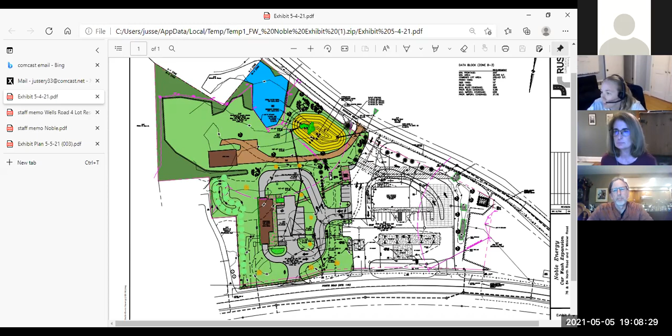Or I'm going to say further to the south, I guess, from where we're located. Let me try and make this just a little bit bigger. Here we go. So there's a wetland delineation line, and I'm following it with my cursor now, that comes around the side of the pond, comes back in, and continues on its way to the east.

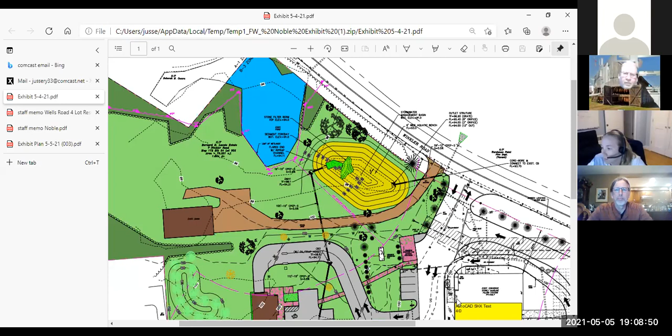And Jay, could you orient me what's north? North would be at the bottom of the page, looking towards North Road. Okay, so we're on the south side of North Road here. So Kurt, if we're standing in the gas station and we're looking out at North Road, we're essentially looking north for the most part.

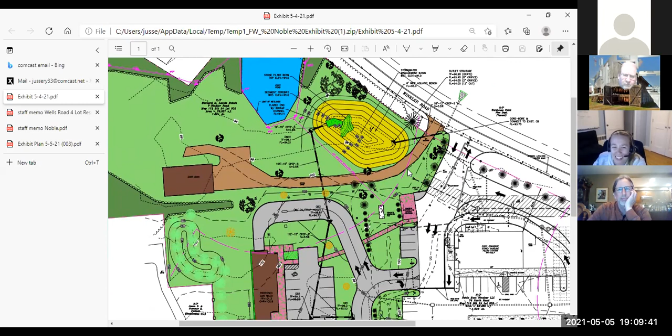So this small wetland area shown on the parcel is actually part of a fairly extensive wetland that continues on to the east and the south, and it's all within the watershed. Now I'm going to try to remember the name of the brook, and Rick Osborne is on, and I know he knows it, but I think it's Bowen's Brook, which comes northerly and westerly.

This portion that we're looking at here leaves this property and goes under a small culvert under Winkler Road over to the side where the trolley museum is, and then continues in a northerly and westerly direction, and eventually gets under North Road, goes down behind the WB Mason's building and goes under Route 5 near, I can't remember the name of the store, but there's a large office building in Enfield, and then there's a retail store on the opposite side of the road.

And it goes under the road there, where the coat factory used to be. Yep, the coat factory. And then goes under the highway and finds its way eventually down to the Connecticut River in Enfield.

So it's a fairly extensive wetland that in fact is part of the same watershed, the upper reaches of the Bowens Brook watershed. So this wetland area here was delineated by John Ianni a number of years ago, when these parcels were subdivided—I think it goes back to 2014.

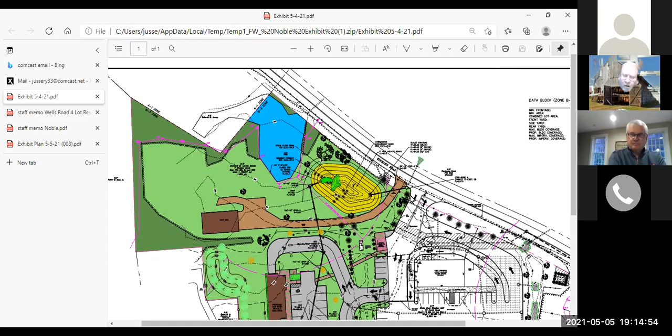Basin with a water quality volume. This will have water in it all the time. It's also got wetland plantings in it to uptake any of the nutrients. And then our outlet is at 94 as well. So as I said, the bottom's at 91 and this is at 94. But to answer your question here now, I've got it a little bit larger, Kurt.

You can see the 100 contour, 98, 96. So this currently drains all towards the pond, towards the wetland, and we're not proposing to change any of that in this given area here. The area down here where we're actually developing will be picked up in the actual drainage.

I guess it would be fair to say there's no developed runoff that's going to go into this wetland. The area of the development here where the paving is and the building is all piped directly into the actual basin and goes out this way. It doesn't go into the actual wetland.

The contributing area to the wetland here will continue to go there, flows across the grass area that Bernie Lavoie actually had mowed all the time he was there. I don't know, maybe it hasn't been mowed in the last couple of years since Bernie's gotten up in age and since passed and moved to Florida. But this area here is always maintained as a lawn area and all flows into the wetland, and it'll continue to do that. We're not changing that.

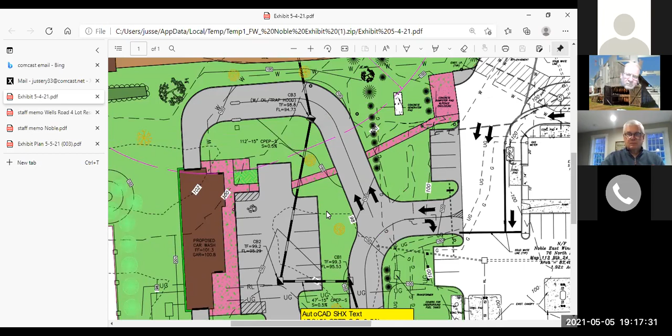And of course, the water that's in the car wash, that's all being captured and dealt with separately, correct? The water goes through, I think, 2 or 3 grit separators, an oil water separator, and then that goes into the sanitary sewer system. The majority of the water, though, is recaptured and reused. I don't know the exact amounts, to be honest, but I want to say it's somewhere around 80% of the water used in the car wash is recycled.

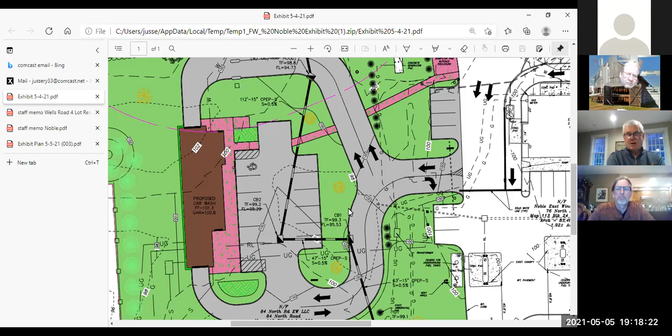If they were to discharge all that water into the sanitary sewer system, the expense to tie into the sewer would be phenomenal, and the expense of the water would be such that the car wash probably wouldn't be viable. The basin is designed all the way up to the 100-year storm, so at any given time during a storm event, there will be no increase in peak flows leaving this site and going across the road into the Bowens Brook watershed.

Without the basin, that worked out all right? Did it work? Yeah, it did. No, actually, without the basin, there would be substantial increases, obviously, because of the increase in impervious coverage. So it couldn't be done without a basin. The basin is necessary because I don't know how well the state maintains their culverts under North Road—you know, they don't do a very good job.

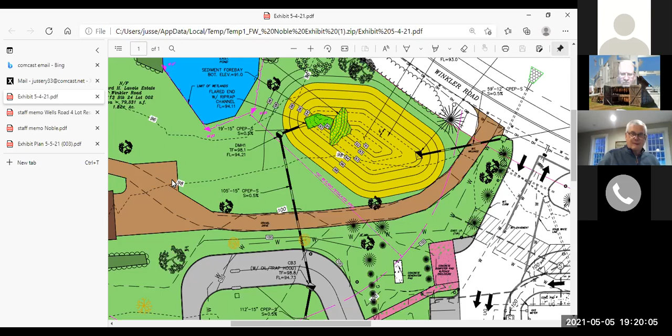Sticking with that detention basin a little bit, the drainage stormwater calculations for the 100-year storm and all that, they're based on the water coming from the pipe that's being collected on the site. Do they also take into account any runoff that's coming from the ground around that?

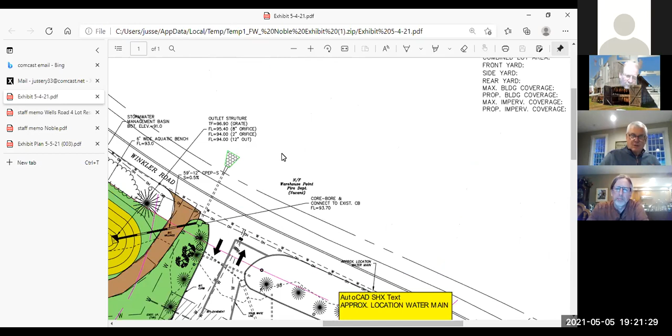Yeah, they do. We look at all the contributing drainage areas, and what we look at is the pre-construction scenario—how much water is being contributed to that particular area, how much is going there pre-construction, and then how much post-construction when we add the additional impervious coverage. So I think what you're asking is do we take into consideration this area that already goes there? And the answer is yes, we do. We look at that because we're adding water, and that's the reason for the detention basin—we want to make sure we don't increase any of the peak flows.

Is there any maintenance on the detention pond? There is maintenance, and I'm going to be honest, I didn't read it, but typically we would put a maintenance schedule on our E&S sheet. I believe it's there. If it isn't, it would be added. And yes, there is maintenance required.

The basin or the forebay does need to be cleaned. It will accumulate some sediment over time and needs to be cleaned out. The basin itself, hopefully not so much. The one thing it does require—and we've all seen them over the years in different locations—is if you don't at least mow it to a certain degree, you end up getting some very large, sometimes woody vegetation. You'll even get trees starting to grow, and you don't want that. That's a problem, so it does require some maintenance. It's not something you build and walk away from thinking it's going to work fine for the next 50 years, because it's not. It would eventually fill back in with trees and shrubbery.

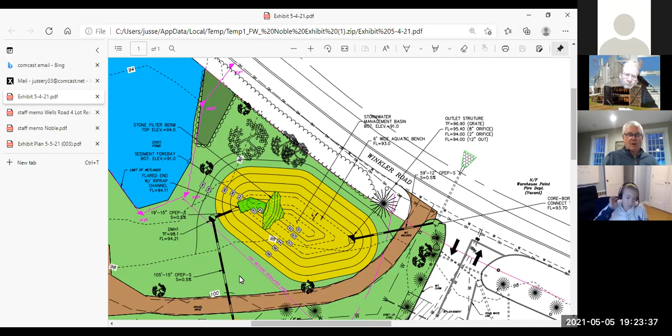Question on that—go ahead, Dick. Since you brought up the maintenance schedule, is the plans going to be good enough to cover us in the future, or should we make condition 15 a requirement? If it's good with the plans, I'm fine with it. It's all detailed in there.

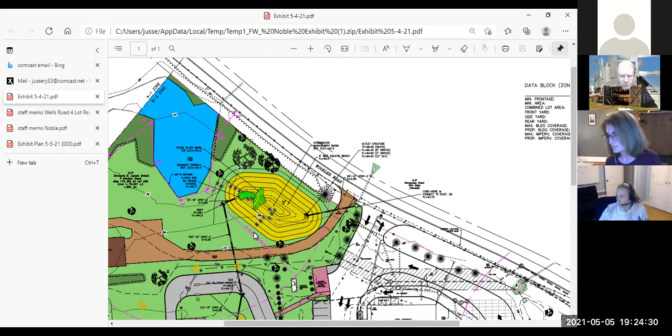The other comment about the flooding around there—I was very skeptical when they approved the gas station, and I really was wondering, and you know what, there's been no problem whatsoever. It's exactly the way the picture shows it. So I think this should darn well work.

I agree, they're going to fix the roads. I read that somewhere. The first thing they better do is lower the pipes under North Road—that would eliminate the whole problem. Dick, when did the gas station go in? What was that, 4 or 5 years ago? Not that long ago. So it missed the big floods from Hurricane Sandy and Irene and all those big storms. Well, nothing's gonna work then anyway.

All right, I don't have all my questions—all of my questions have been answered. So I'll open it up once more if there's any other questions. If not, I would entertain a motion to approve. No questions? Okay, well, thank you, Ruth Ann.

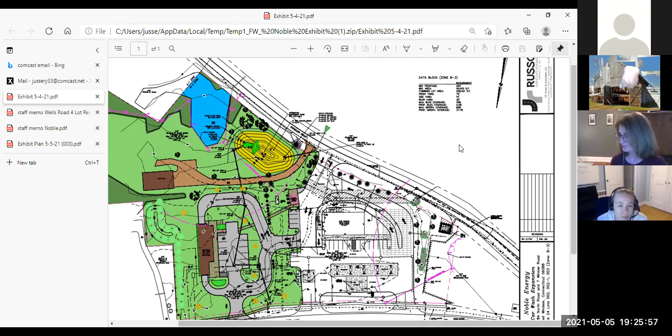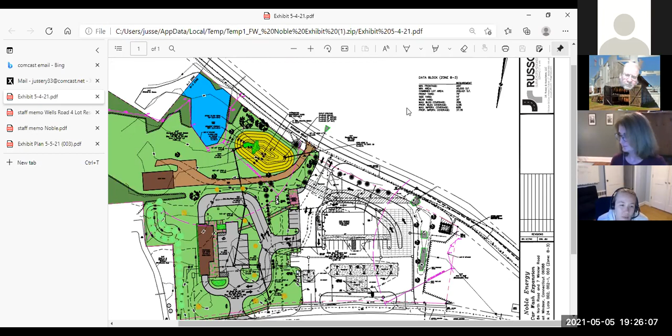Motion to approve application IWWA 03-2021 to Noble Energy, Noble East Windsor LLC, for the construction of a 2,340 square foot car wash, associated parking, drives, and stormwater management systems in the Upland Review area, located at 76 and 84 North Road and 7 Winkler Road, Assessor's Map 113, Block 24, Lots 002-1 and 003, as detailed on site plans entitled Noble Energy Car Wash Expansion, 76 and 84 North Road and 7 Winkler Road, East Windsor, Connecticut 06088, Map 113, Block 24, Lots 002, 002-1, 003, zoning B3, prepared by J.R. Russo and Associates LLC, Sheets 1 through 11, dated 4/05/2021, last revised 4/28/2021, with the standard 14 conditions.

Second. I'll second that. All right, I heard Alan first for the second. Any further discussion? Hearing none, all those in favor? Aye.

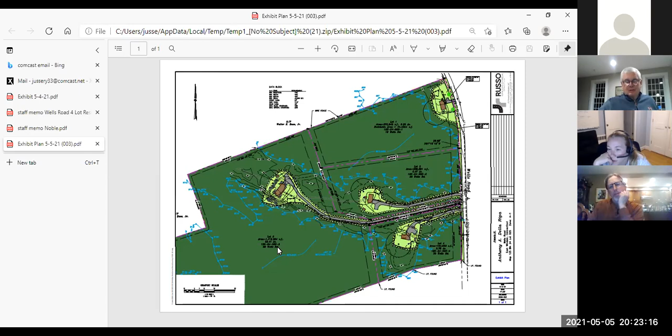So on the back lot, it would be on either side - I guess it's the north and south side of the lot, right? And the same here. And it's only the north side of the lot on the middle lot, and only the south side of the lot on the bottom lot, and the west side of the lot on the top lot, right? So I don't think we need to specify that, I felt like Jay would figure that out.

That's why I gave you the 200-foot number as a kind of maximum. Maybe, as depicted on the approved plan or as depicted on the Mylar. Yep, we could say that's going to update that for us. Why don't you go with that one, Dick?

As depicted on the Mylar, because Jay will send us a revised one with those on there. Okay, here's what I got before - this is not the motion: approved wetlands disc markers shall be installed prior to construction.

I've been typing, if that's helpful. Oh yeah, we don't need to - you're typing it too? Yeah, that's easier for me. But I need control to be able to share my screen.

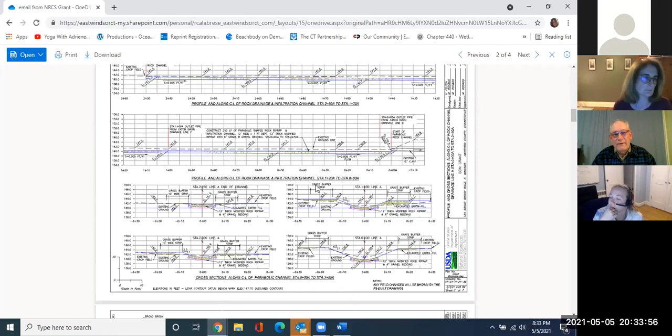In addition, as part of this they're going to make repairs to our current pipe, where we have a couple of damaged areas. The idea is to leave the pipe there basically as an overflow should the infiltration bed become overwhelmed, but he assures me that's probably not likely if it's designed properly.

The state, like I said, was understanding, but nothing they came up with as a plan was really a viable option, and this seems like the best way to go.

The field itself has had the development rights purchased on it, and as part of that situation, we're required to seek their approval for any construction project on the farm, including something like this, and they have given us their approval to get this plan put into action.

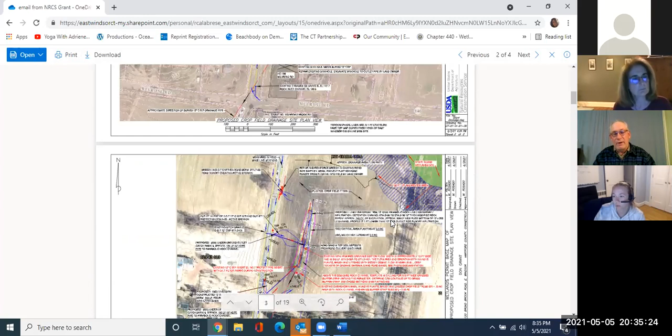The NRCS will be overseeing construction of the infiltration bed and the repairs to the pipe. I almost forgot to mention, where the outlet is to the culvert that currently runs under Broad Brook Road, we're going to put in our own catch basin and a pipe to stop the erosion across the field. South of that, where the berm on the east side of Broad Brook Road is compromised and water runs into the field, there's another catch basin and pipe carrying the water under the field to the infiltration bed.

We're not really going to affect the amount of land being cropped, except there'll be a 10-foot grass buffer around the infiltration bed. What's there now is basically sumac, so that'll be an improvement if nothing else. So that, I guess, is it in a nutshell.

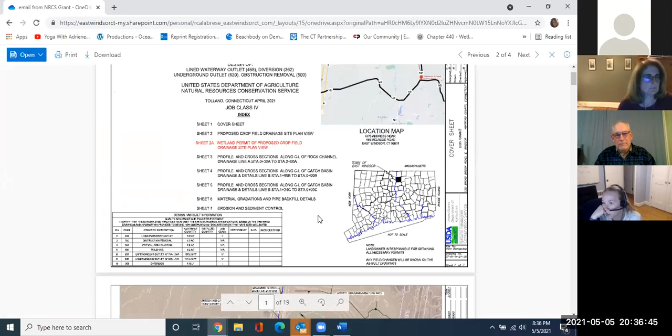So what did you need from us? Just an approval for the, what are we, an as of right? Yes. Yeah, I have zero issues or concerns with this. Does anybody else have any comments?

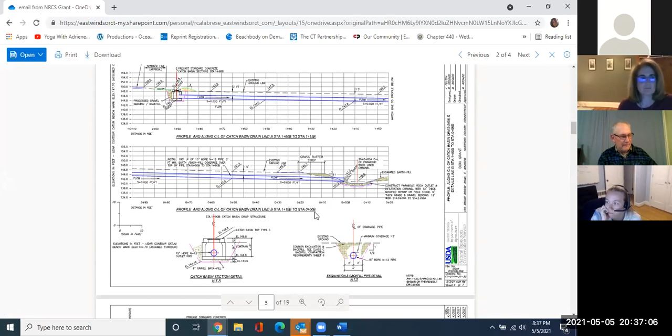Good, continue to farm here, right? Absolutely. I'm happy to hear that the other side is getting addressed. I've been watching that and feeling like it needs some attention for a while now. Oh, here they are, I was looking for these.

Just to get a sense of the area. Yeah, I'm definitely familiar with that area too.

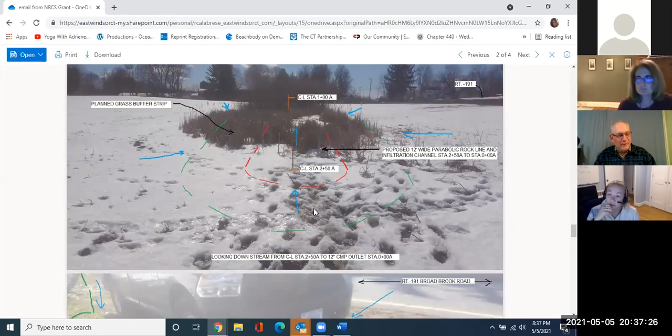It's pretty obvious to see, so we didn't think we should proceed without having approvals. It's not the kind of thing you can sneak by - you'd definitely notice that one. It's like that front lot there you were talking about previously. If you drive by, you're gonna see it. Yep, I might catch you on that one, Don. Yeah, you might.

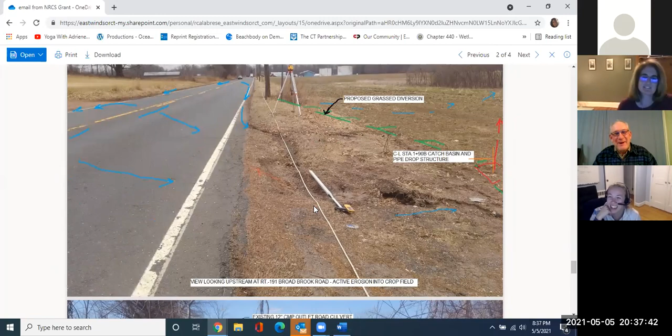Okay, what do we need? Just a motion to make - let me just, if I might, someone made a comment about noticing a problem with the washout on the west side of Broad Brook Road, south of Melrose Road. Yeah, that is where this pipe comes out, is in the low spot down there.

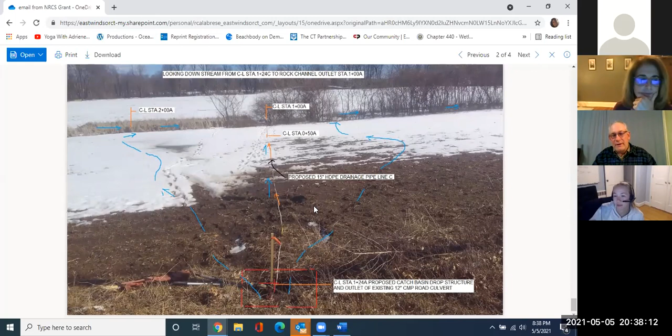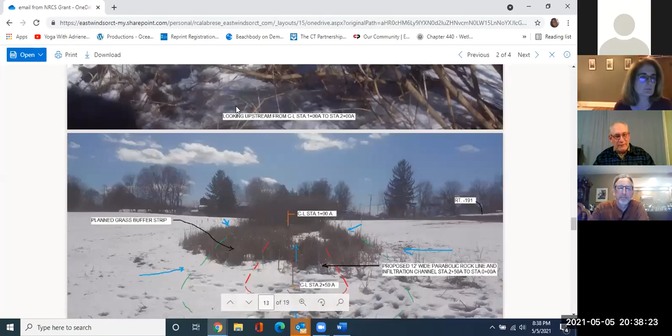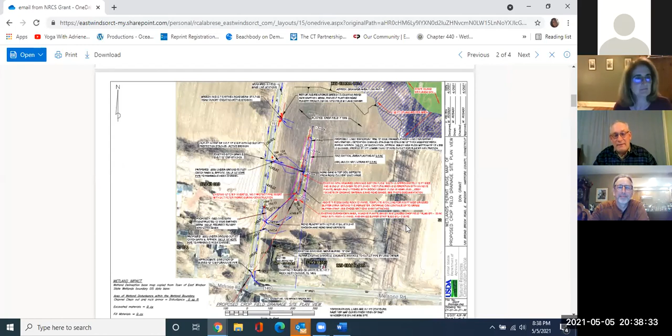Another part of this plan that I'm not mentioning now because we haven't done the engineering on it yet is we'd like to make improvements on the outlet side of our pipe as well. When I contacted Monique Burns, she and I kind of wandered around and looked at the state culverts, and they found out that they actually had no outflow from the 3 catch basins at the intersection. So I don't know if you guys know, they worked on that last fall, I think it was, and extended their pipe down alongside the street south of Melrose Road, west of Broad Brook Road. So their culvert now is an outlet within about 25 feet of our outlet pipe.

And another culvert actually drains my lawn across the street to that same location. So I talked with this engineer from NRCS, and as kind of a phase 2 on this project, we'd like to make improvements over there because we're anticipating that if we get a big storm and all 3 of those pipes are coming out within that very small area, we may wind up with bigger problems than we want. So I'll probably be back to have the same sort of presentation for you on how we're going to handle that outlet side of it. Hopefully in the fall, but the way things drag out sometimes, it wouldn't surprise me if it's a year from now.

Don, I have a very quick question because I'm not as familiar with the town as everybody else. I think we bought sweet corn from that property at one time - what are you farming now? I'm raising hay. My wife and daughter have a herd of show goats, and I also work at the fertilizer company down on Chamberlain Road as a full-time endeavor. So right now, this field in question, we're actually renting to a farmer from East Longmeadow, Massachusetts, who's been raising pumpkins on this field the last few years. So we're kind of doing a combination of several different things. Awesome, thank you. Yep.

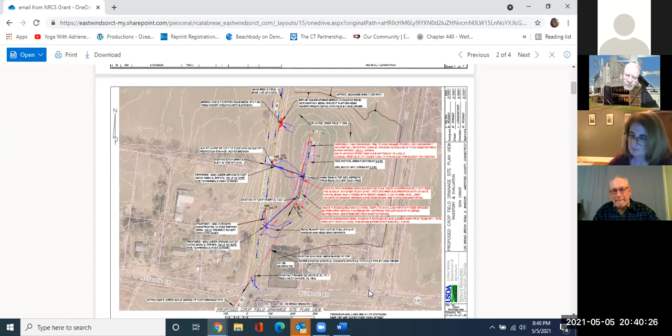All right, any other questions? Dick, did you have something? Yeah, okay Madam Chairman, now what do we need - a motion to have Ruth Ann handle this, or how formal do we need to get? Finding of it is, it's an as-of-right determination. So I think we find that they have a right to do this in the context of their farming operation.

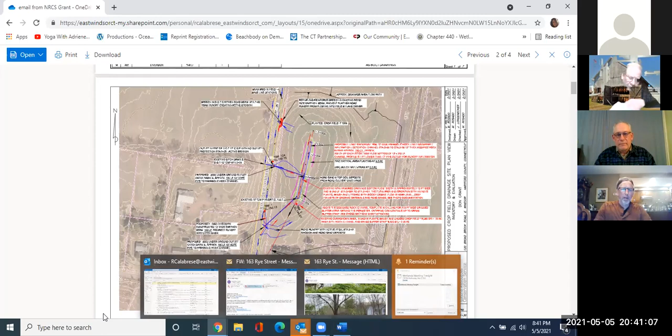Okay, now how do you want to do it - by the property owners or the name of the farm, how do you want it to read? How is it addressed in Ruth Ann's paperwork, since we don't have a hard copy here? Oh, I'm the farmer in question, so I suppose my name has to be on it, but my father is the property owner. So if you want to include all of it, as far as I'm concerned, that's fine. Why don't we just do either that, or include the map, block and lot - I can tell you what it is. Okay, give me the map, block and lot. 135. Bear with me on the block. 43A001. And then lot 001A.

So I would like to make a motion. I hope I'm gonna do it right, and if I'm not, I'll never hear the end of it. Have a finding as of right for the Grant Farms - Phil, Don, Selma, the whole bunch - for a plan submitted by, who's the, USDA drew that up, Don? Yeah, NRCS. There would be, map 135, block 43A001, lot 001A. Did I get that for Fagan?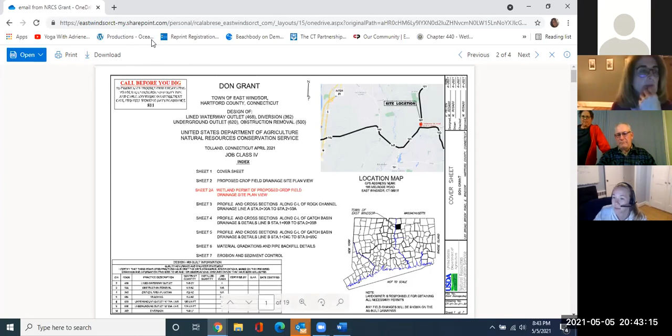Ruth, you're still sharing, so you might as well keep going. I'm just going to back out there. I don't know why it's doing that. Oh, I think because you've already downloaded it. It did that to me too. I'm not sure, okay, right there. Oh, I did because I printed the cover. There you go, all right.

Okay, at the last meeting we talked about Sullivan Farm Road, AKA Quarry Meadows, and a couple of open water pond type areas that were present at one point in time and are no longer there. I was asked to write up some information on the parcel itself.

So I'm going to share with you what I have. Looking through the assessor's property card, that property has been owned by the Kemet Development Corp and variations thereof through time since 1968, as far back as I saw. We have a wetlands report on file from 2005 that confirms the only wetlands identified when that subdivision was approved.

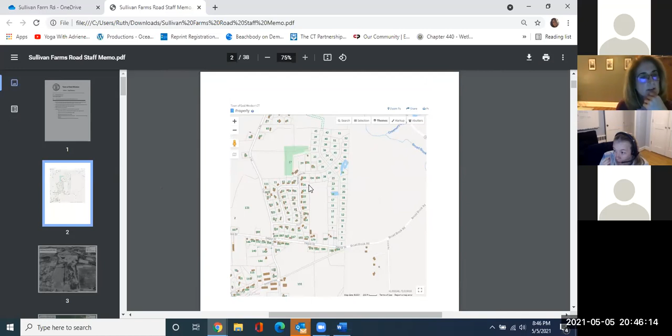So as we scroll through, this is Quarry Meadows. These are the two water bodies that are on our GIS that are not physically present today. Google Earth, I could go as far back as 1990 with their history. Just as a point of reference, this boundary is here, this tree line. That's 1990. Here comes 2003, and you can see the area has been cleared.

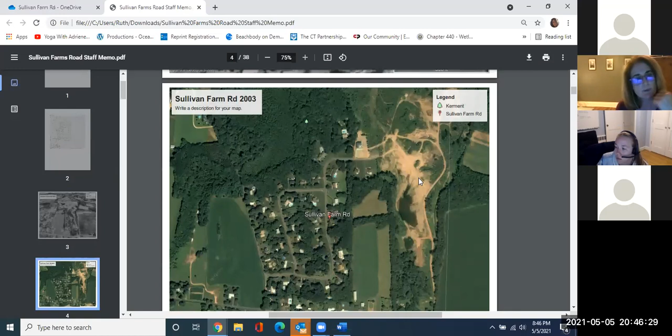I know we talked about the gravel operations. There's water here and here, which kind of matches the base map. And then in 2004 there's more earth moving, regrading activity. You can see a big difference here and here. That pond.

So that's kind of a historical look at that. This is the wetlands report, and it does say that at that point in time, the only wetland... and there's the approval that was granted for the 48 lot single family subdivision. That's the wetlands approval.

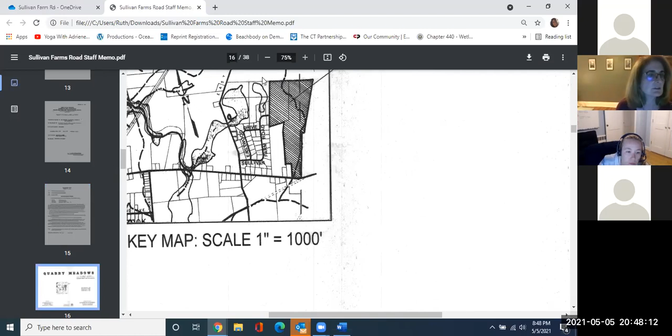This one I'm going to have to scooch down in size. Hopefully I can navigate on this well. I put... gonna let my computer catch up with my mouse. Okay, maybe I can do it this way.

Did I say what sheet it's on? Yeah, I was going to ask which one is lot 12. I'm hoping I didn't scroll past it. Yeah, there's the detention basin, so I did. That's the left, right. Okay, I got a note on 9, 10, so here's, actually all right, so I pointed out here's the 150 foot review area line, go to sheet 10, I think.

Where am I? I thought it was like one right after the other. I would assume so too. Sheet 10, 7, 8, sheet 10 will show you. I'm having mouse problems, my index finger is losing control. There you go, so it's on this one, coming up right there. Yep, so on the bottom, okay, lot 12, right there. Yep, I had a note in there. Okay, yeah, so it's right here, lot 12.

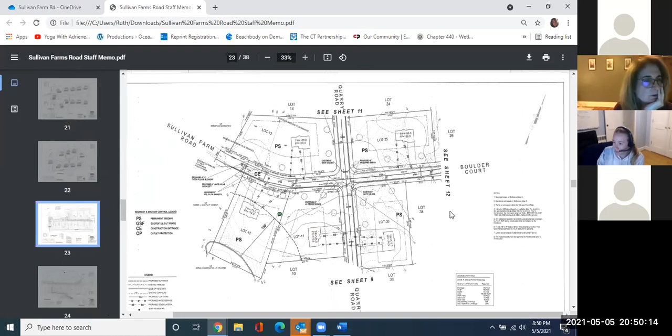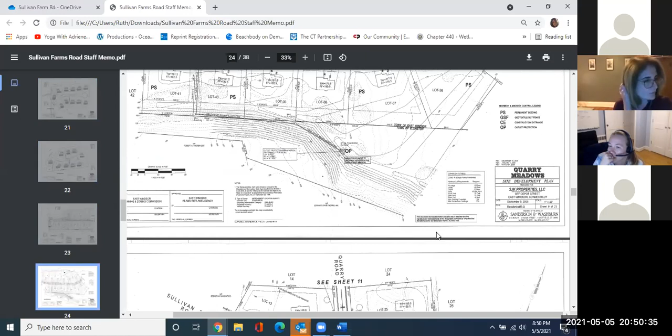Do you want me to go scroll back up there? Doesn't matter. Okay, so I guess my thoughts here are: there's a history, there was open water, there wasn't open water, there was a lot of activity moving, regrading and quarrying.

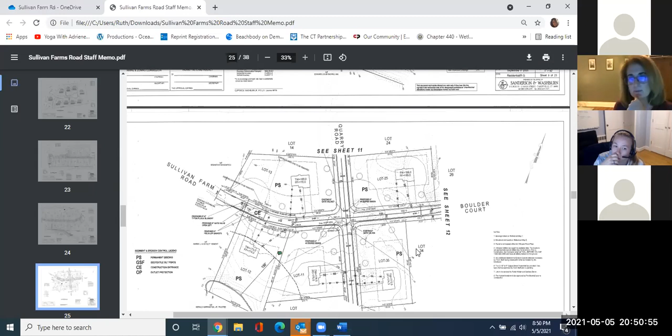The permit for this subdivision has expired, right? And we know that the property owner is seeking to develop that property. They've been trying to get a text change to the zoning regulations, and speaking with Merrick, he knows full well he will be before the wetlands agency again. He's got plans he can't move forward with, because he needs approval. And I think at that time it would be wise, since he knows he needs to have his wetlands delineated.

And so, it's been a decade plus, there could be wetland soils there. If the groundwater's that shallow and it's been that long.

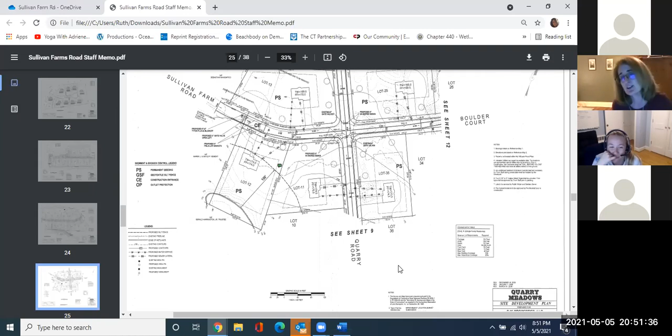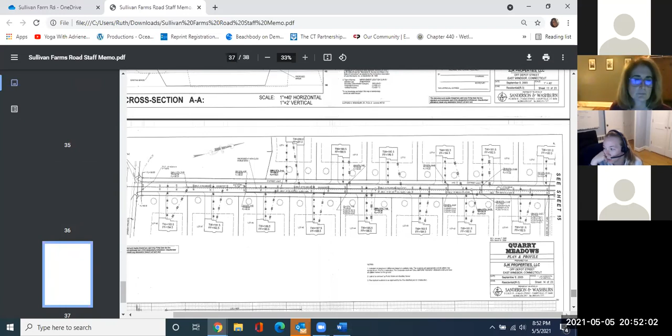I think in terms of a violation, it's safe to say that there is no violation. Things have changed over time due to the nature of the activity that was occurring on the property, and as you said, they know they have to come back for wetlands approval for any future development.

So I don't have any concerns with it. I think it's good to see all this, because what somebody might consider a beautiful pond was actually just a drainage area for excavation during an excavation permit. I think it's kind of clear to see that. So I don't know about anything else that happened, but from my point of view, I don't see where there's a violation here.

Okay, and then I have some thoughts about the GIS layer too while we're talking. I don't think it's the only place in town where you come up with wetlands. There are some developments, I don't know if it's that that layer's old.

So I just wondered if there was something there. Yeah, you and I can talk offline about a separate thing for that. Okay, all right.

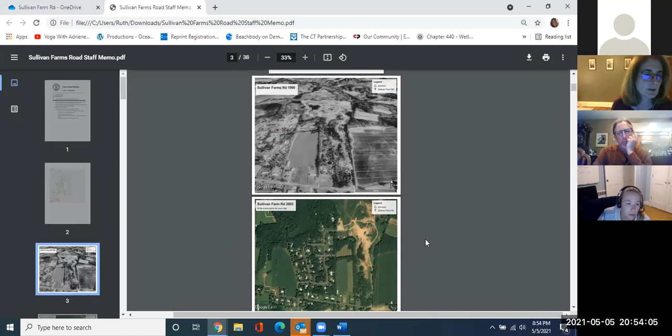Okay, yeah, I can circle back with the consensus, and that the property owner will be back before the commission before any approvals for development go through. Okay, cool. All right, and he can walk us through this at that point in time too. I'm sure he'll be happy to do that.

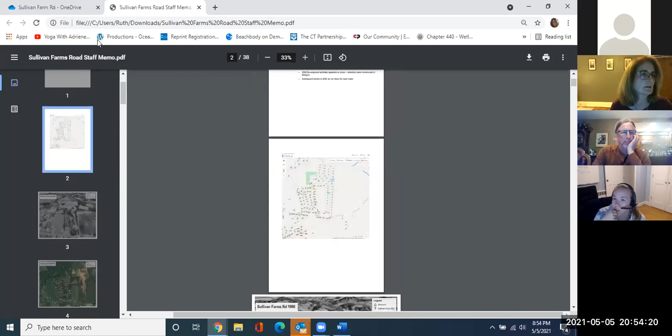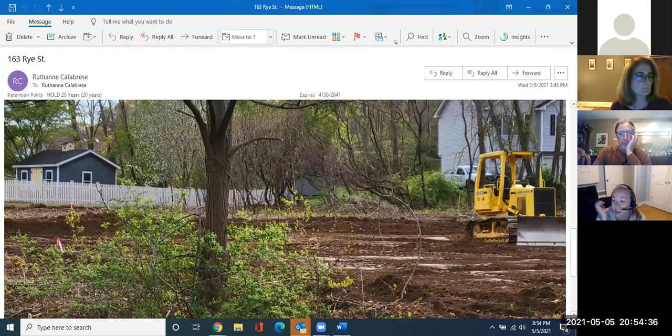So moving on to the next one, which is the new item, 163 Rye Street. I drive by there quite often, and I noticed there's a detention pond out front, and they're building and doing work. So perfect, you went out and took pictures, Ruth.

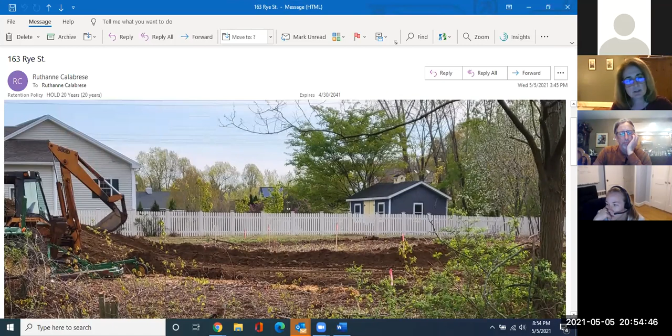I did. All right, so this lot is part of the Kingshire subdivision. This is like the last remaining lot that was permitted before the town officially put on the land records that the subdivision had expired. I have spoken with Letourneau, who is the builder out there. He had trouble finding silt fence to protect this.

And I think I must have, just want to see. Gotta move this, oh this is really hard to do with all this. I'm moving this over so I can open the plot plan for you.

It's been waiting for prime time all this time. All right, here it is.

So this is the detention basin that was approved as part of the development of Kingshire. And this is the lot being developed, and this is where silt fence ought to have been. The builder could not locate silt fence. When I called him Monday morning, he said one of his guys had found silt fence in Simsbury and he was on his way to go get it. I haven't been back out there, haven't driven by. I intended to when I left work today, but somehow I just went home.

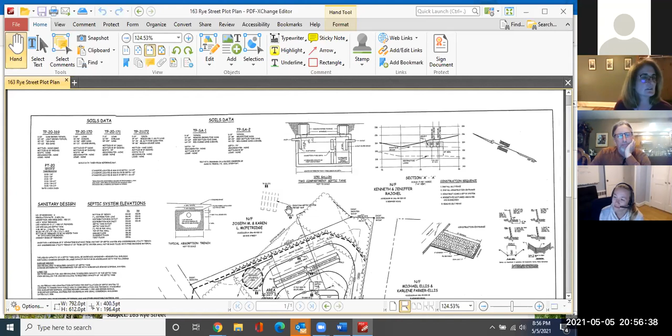The other thing I wanted to share, let me close this. That's the Mylar, with the wetland layer, just so you can get a sense of where he's at. He's right there, it's totally just a detention basin.

The builder, without me even prompting him, when I called, said he had been in discussions with Len Norton already about doing some maintenance on that detention basin. So that's another thing too. If it's a detention basin in this area and they're going to do some maintenance work on it, that's exempt, right? That's an exempt activity.

Yeah, so I just wanted to say, it's just we approve all these things based on this super awesome engineered system that's going to take care of everything for us, and then they go to hell for years. I noticed, when I go for a run here and there in South Windsor, they have signs up at some of their detention basins that have had neglect for 20 years. So they've somehow figured out a way to have a little project of going and cleaning up all their detention basins that are no longer quite functioning the way they should.

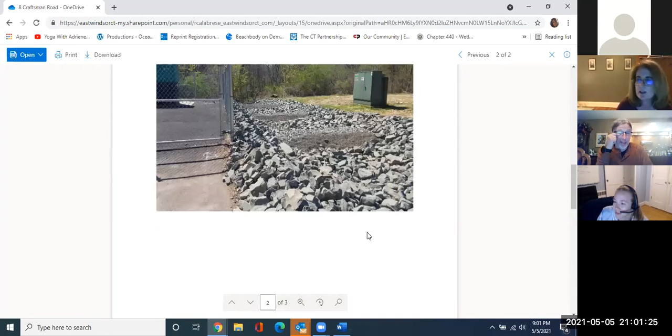So that's what it looks like today. Pretty extensive, I was wondering how they were going to handle it. They went downtown with it, they went all out. But I think it's great because that was in tough shape over there. That was bad, I was happy to see it. Maybe overkill on that repair though. It'll last, that should last.

It'll last and it'll take a long time for it to be inundated with organic growth, like trees growing out of it. As long as they keep trees out of it, it'll last. All right, so we can close that one out.

And resolve that issue. And then the 247 South Water Street - I don't know which order I should go in, but there's just so much, there's a couple of issues. This 247 South Water Street is the outfall from 12 South Main Street development.

They have an easement from Noreen Friedman, and I think Noreen was on the call - she was, yeah, Noreen's still on the call. So I had received a complaint about the outfall area, called Ugo Orsini who works for Silverman, and he right away went out there and inspected and sent me some pictures, and was working on a remedy with J.R. Russo. The remedy was going to require heavy equipment.

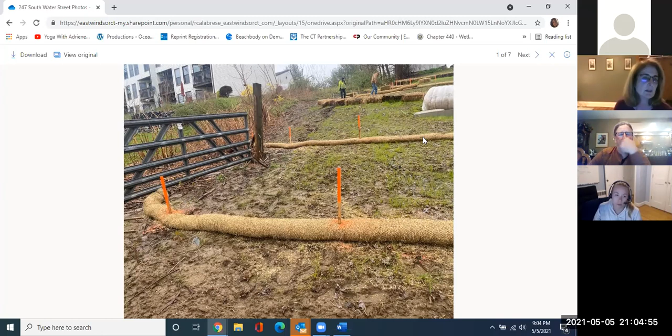And it had to do with this condominium complex, their parking lot - they had a little swale up here dumping stormwater, which probably worked just fine until this got cleared for development. And it really created this big issue, same thing that was happening at 8 Craftsman Road. None of this was there at the time of our site visit, but this is the same day.

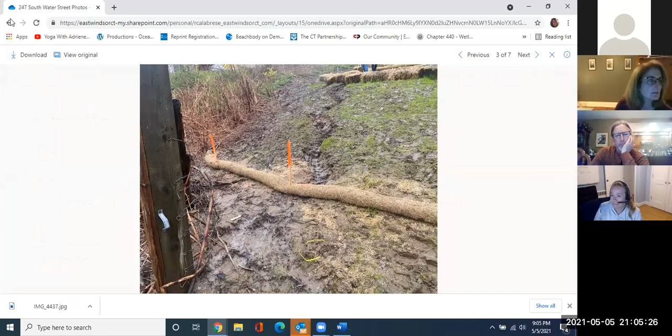These guys ran out and - why can't I go, I know there's more than one picture. They went to town over here. No, we don't want those on the home computer. Putting these in temporarily. I don't know if there's anything quite that much more, but you get the sense of what happened out there.

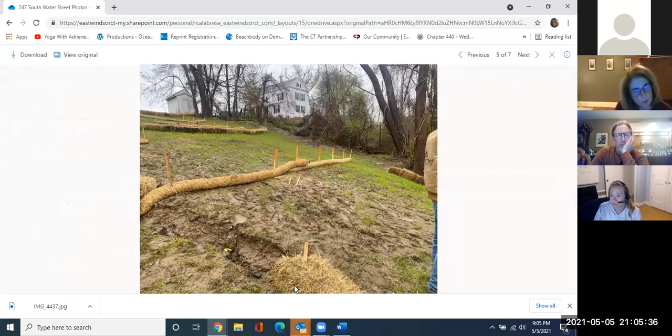So there are 2 issues: there's this overland erosion, and then there's the seepage coming out. What I had received just recently is what they intend to do to fix it.

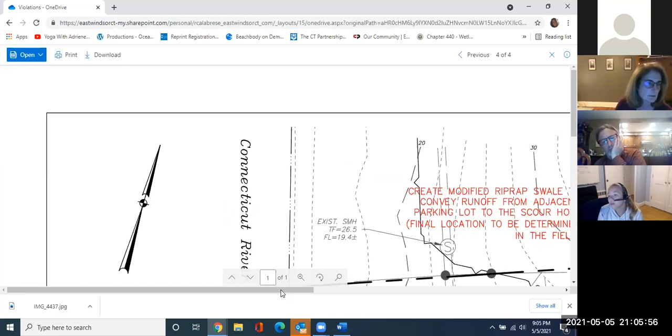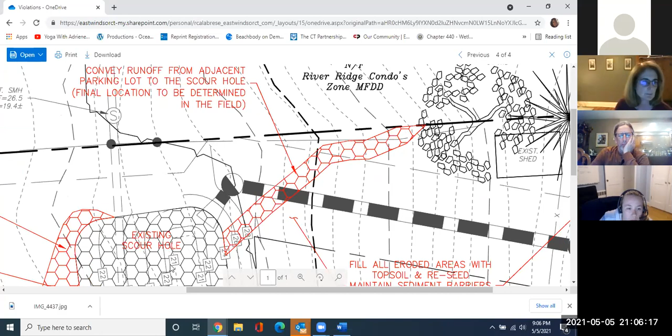Too big, but okay, so this is that part that's eroding from the condo area. They want to put riprap in here and make kind of a swale into the plunge pool. This is the underground piping that comes in and spills into that scour hole. So they want to do some riprap over here, and they understand that they may need to get an easement for that.

Here is where they want to remedy the groundwater seepage. So they want to put down some fabric and riprap and make a direct outfall down here to capture the groundwater, so it doesn't erode over here.

So the groundwater is just pre-existing and it's underneath their scour hole - yeah, an unanticipated glitch, right? So it's coming out from the side of the hill underneath the concrete.

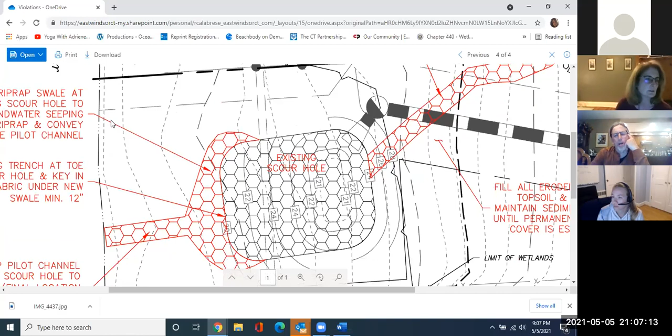And the chocolate colored water, what was the source of that? I think that was just the construction activity and the heavy rain - that was quite a storm. Yeah, plus it was collecting all the runoff and stuff from the road, from all the construction with all the dirt.

Right, and it was a little concerning though, because it's supposed to be stuff on their side of the road. Well, and yeah, they did say it could be that some of that erosion happening down the side here was getting in as well. I mean, that whole bank isn't stabilized yet, but the plunge pool itself was coffee colored, not unlike the Scantic River on a rainy day.

It's an impressive velocity, all that area coming down the slope into this plunge pool. One of the things that was beneficial for us, particularly having Len out there - there's the plunge pool, and then there's a lip area the water flows over into, very Disney-ish, little cascading. That was not level, so they are going to do some repairs because the water was congregating to one side and going off in more volume than if it had the whole surface to run over.

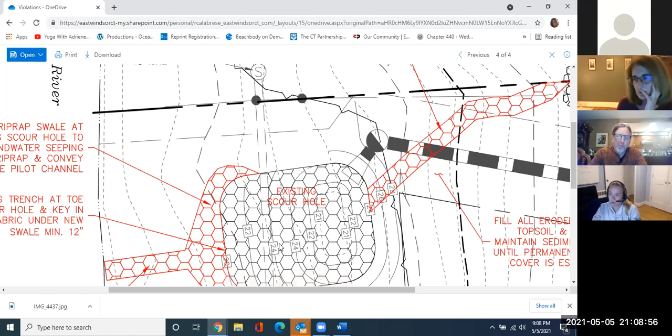So it was good to see it working and see where it could be tweaked to work better. But we're looking to get any feedback on this first cut of a plan that J.R. Russo has prepared.

Well, is their permit, their wetlands permit, still open? We checked that - this was the permit that we transferred to them. Yeah, Sardelli, yeah, so I think that still had a couple years left on it. Just make sure, because if it's open, then I think we can approve this change without any issues, but if it's not, then they need a wetland permit. Yeah, I would agree with that. And I am so glad we actually went through the trouble of transferring that permit.

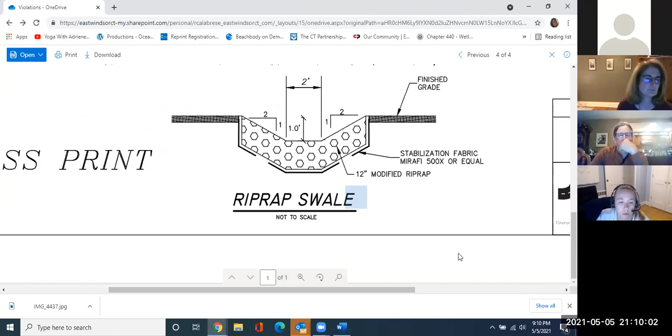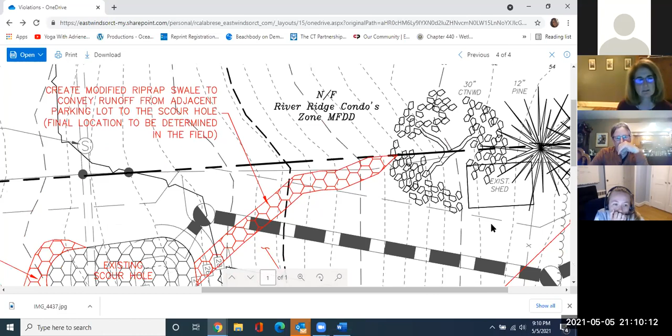One question on this - didn't they start this thing late in the fall? Remember, I was harping on this, that we had to watch this site particularly because of the steep slope and the terrace escarpment soil, and that it should be completely seeded by October 1st. I think they started this in October, didn't they?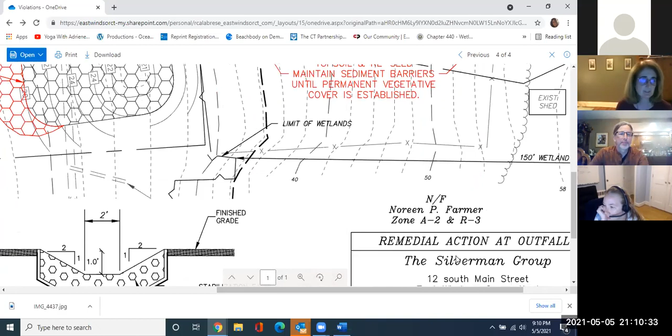Yeah, I think they had gotten a late start on it, went through the whole winter with this. They definitely got a late start, and you see what I've been preaching about. This should have been done, this grass should have been on that before winter. I think you would have found a lot less problems if it had been.

Maybe not because of the parking lot runoff, but because of the looks of these pictures, the grass is not even - it's starting to establish, but just starting. And we need to watch this on these steep slopes.

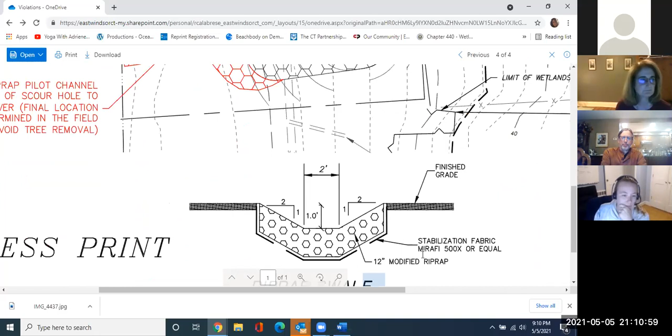Agreed, I don't think we made it a condition of approval though, that they couldn't do it after - that thing could have waited, either that or get on it before the growing season ended. This is, I'm not thrilled about this.

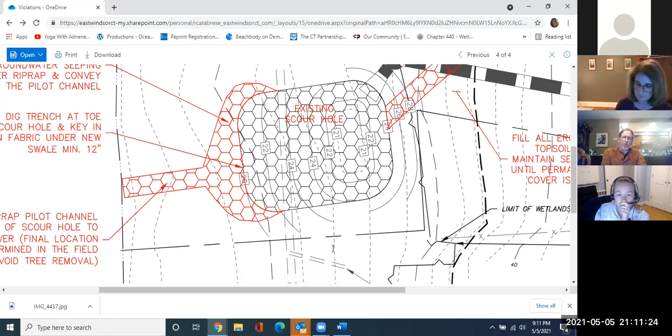Well, if you remember correctly, it was your suggestion that they take - this scour pad was actually concretized - that probably wouldn't have survived all this if it wasn't. So it was good on you for putting that in there.

Yeah, but it still should have been done, Al, when the grass had a chance to grow and establish. I agree. And we need to really watch this in the future, in certain areas of town that it's really that steep and that fine of soils.

Yeah, and I absolutely agree on stuff like this, that it gets to a certain point in the year - if you don't make it by then, I don't care if it holds up your project, you're not doing it till next year.

They could have put a temporary holding pond, a settling basin for the winter, and continued with their work, and done this in the spring when they should be doing it and seeding it, or done it in the fall early.

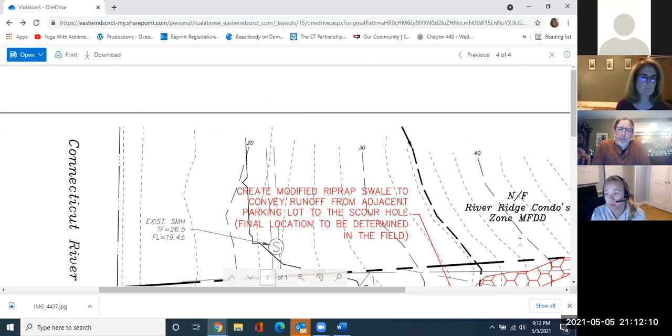I mean, like I said, I'm rather disturbed with this because I think we've been reasonably lenient on this board, and this is what we get.

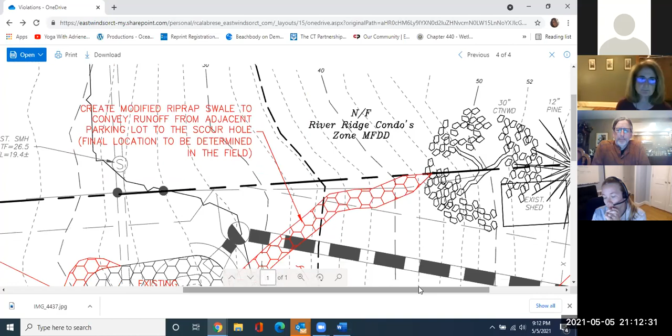We definitely need to follow up on this and keep after them. Because we did do that on the gentleman down the street that's going to open a car dealership, where he does have a date that it has to be done between, because he's on a steep slope too, and that one we made a condition of approval. I think we should from now on.

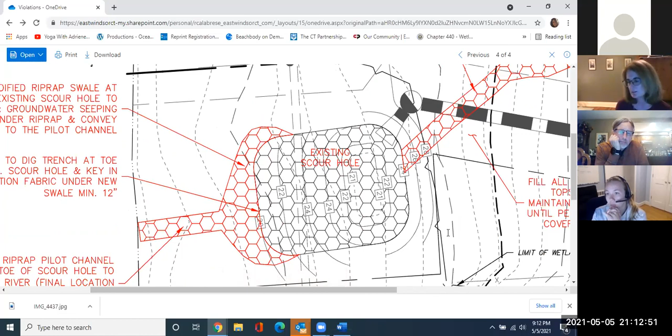Wilcox Construction has that project, and I talked to Jerry about that already. Okay, good to know - so Jerry will cooperate.

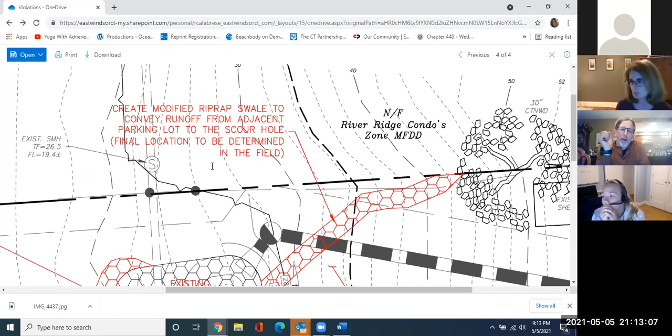Just before we move off from that, I'm still concerned about why the water quality structures didn't work. I'm still not satisfied. I know there was coffee colored water coming out of there, and it would concern me that if there was some infiltration along the pipeline, then that problem's not getting solved.

I remember at the site visit someone brought up that initial storms like that, and the new concrete, can also wash out fines and suspended solids and such.

Yeah, I think with all the rain we've had, we might want to take a peek at that this week. If you remember that storm we had late in the fall, Al, that was absolutely one of those 100-year type storms.

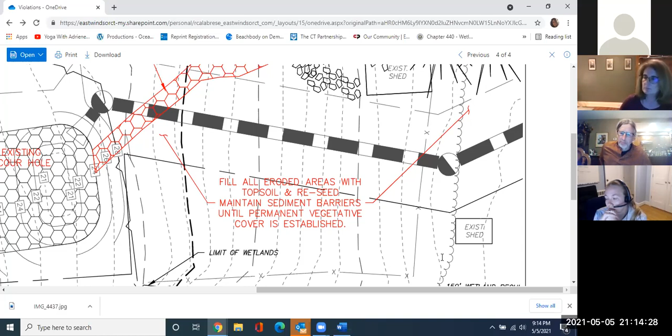And it looks like a lot of this erosion, some of it's definitely from overland water coming down the slope. I have a set of pictures. They've got the wattles across it to protect it, but you can see there's a lot of flow, and that would give you pretty brown water, wouldn't take much to do it. You can see there's been a serious water flow overland.

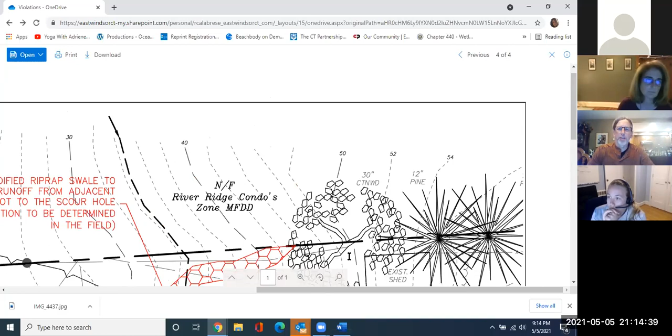I'm always, when the engineers are presenting stuff to us, I think we have some good engineers, but I'm always a little skeptical, and I always like to go back and look after it's done to see if it's actually working like they said it was going to. I actually, like Jay geeks out on maps, I geek out on detention basins.

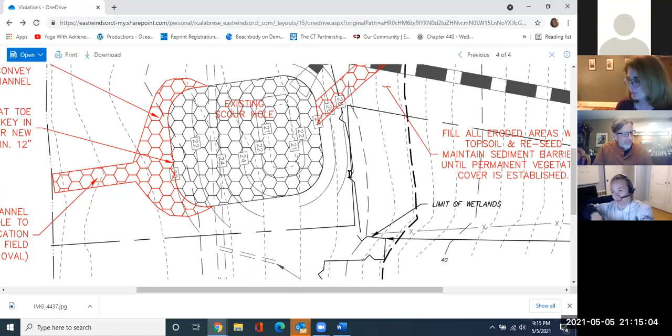Okay, so I have to check to see if the permit is still open and active, and we could modify it, or you could do that. And then I'll be out there to inspect it again to see how it's looking down there.

Sounds good. Moving on, there's no conferences, seminars, or trainings. Assuming that there's no correspondence, is that correct?

The only item I put in there, we had notification on a solar project in Ellington. Oh yeah, I saw that come through. Right, don't know how much we need to discuss it, other than it's 30 acres of development over 160 acres, more than 6 megawatts. More farmland ruined.

That's fine. Yep, just the FYI on that one. There we go.

And then I incorporated the response to the correspondence from the Deeks, I think that's how you say their name. After the last meeting, they had some more questions, and I incorporated that into my report, and I had told them that's how I was going to address it. And so there was a review done for the presence of wetlands, which we talked about.